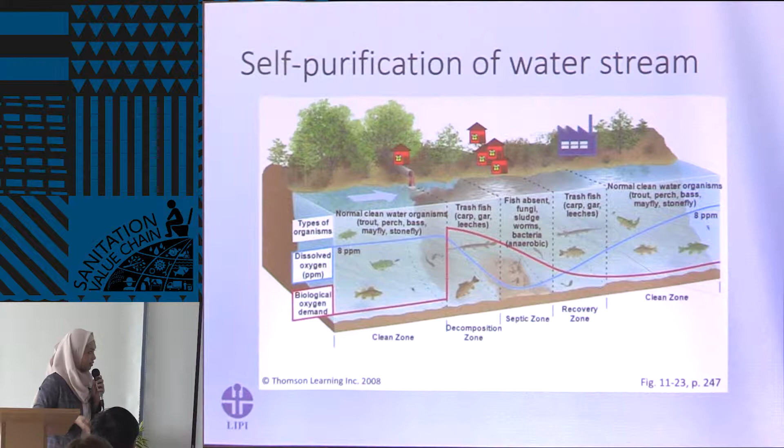We also asked about solid waste management. Some of them say that their household garbage is taken by a garbage man. Some of them just throw the garbage to the ditch, and then it goes to the river, just like we saw. And then some of them burn their waste. So there is a problem.

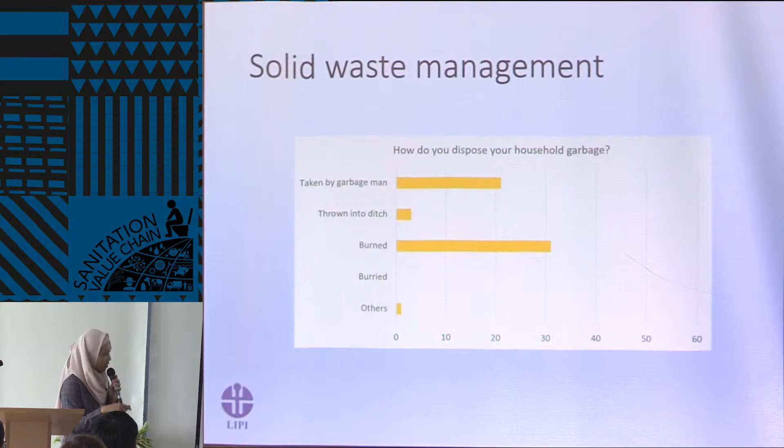What we found is that there is no current problem with the sanitation. There is still some problem with the waste management. But what we find is there is a problem with the tofu wastewater. You remember that there are about 100 entrepreneurs in Giriharja village. So at least 10 of them are tofu factory owners, because there are 10 tofu factories in this area. And these tofu factories generate 18 to 36 cubic meters of tofu wastewater per day.

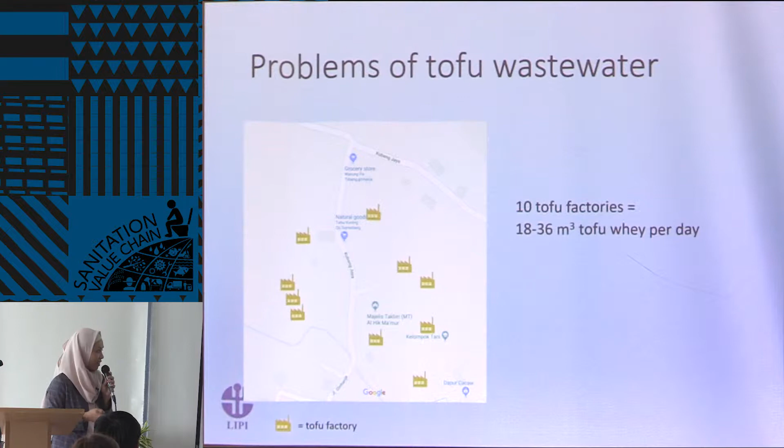And around 50,000 people who live downstream are affected by tofu wastewater discharged to the river. And not only the people downstream, because this tofu factory is actually a small-scale tofu factory. So these are just regular houses, and the tofu factory is just adjacent to them. In fact, what usually happens is that the tofu factory owners just build the tofu factory at the back of or next to their houses. So people live just next to the factory.

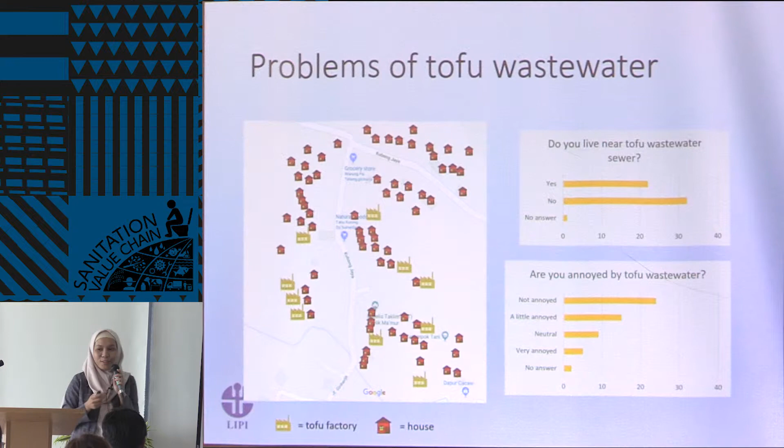So we asked whether they live nearby or not, and whether they are annoyed by the wastewater. Surprisingly, some people said they are not annoyed. It's probably the ones that don't live near the factory. But still, some are a little annoyed. Fewer people are neither annoyed nor not. And not a lot of people, only 5 people, are very annoyed by the wastewater. We also asked what causes the annoyance. And most of them say that it's because it smells.

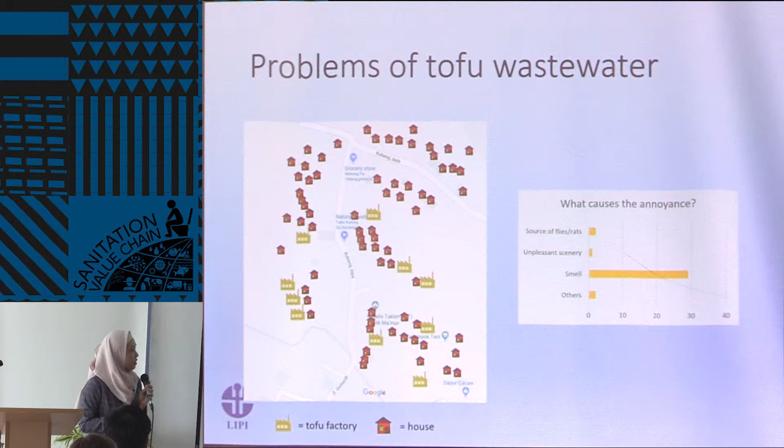So in 2014, starting 2014, we initiated a wastewater treatment plant to treat the tofu wastewater with a grant from NTU. The wastewater is treated using anaerobic processes in multiple stages, using upflow and fixed bed reactors. It's currently operational, producing 120 cubic meters of biogas per day.

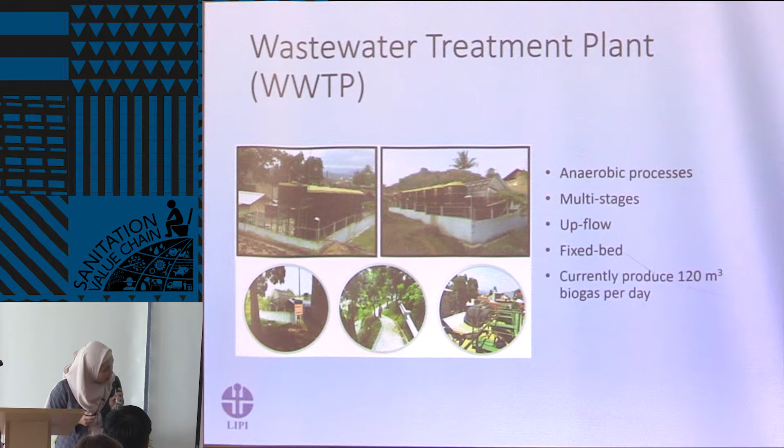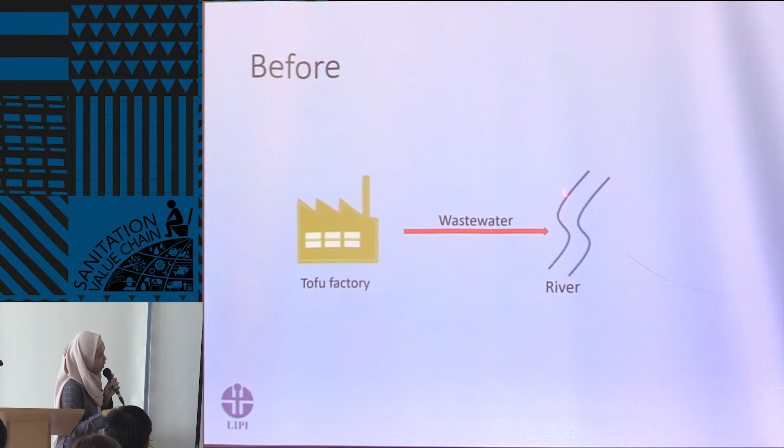So this is the before situation. We have a tofu factory discharging their wastewater directly to the river. But now the wastewater goes to the wastewater treatment plant, and the treated water goes to the river. And in addition, we also have biogas, which can be used, which is piped to the houses for cooking.

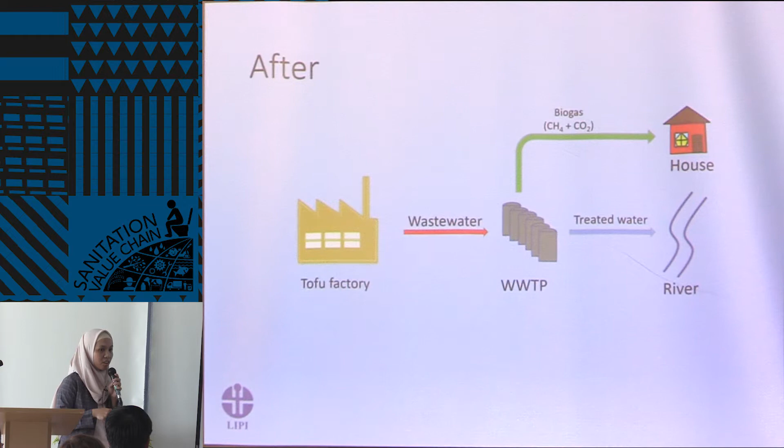So we have 88 households using the biogas. Before, they used these kinds of LPG cylinders, and the price is 25,000 rupiahs or 1.76 US dollars. And the energy that they need for cooking is actually less than the energy that is produced by the wastewater treatment plant. So they can save this kind of money per month.

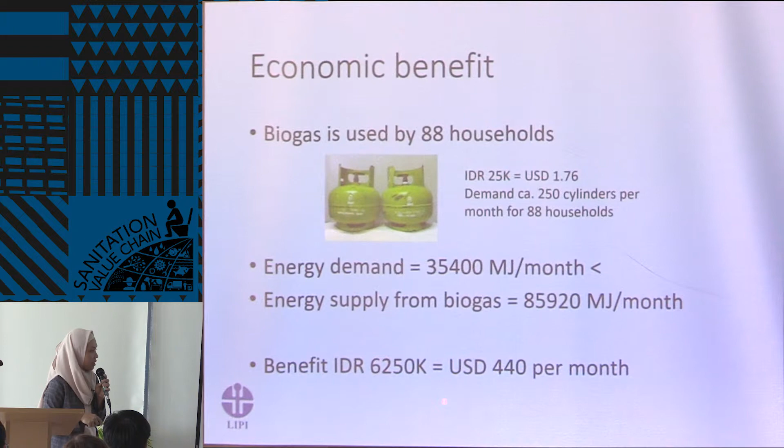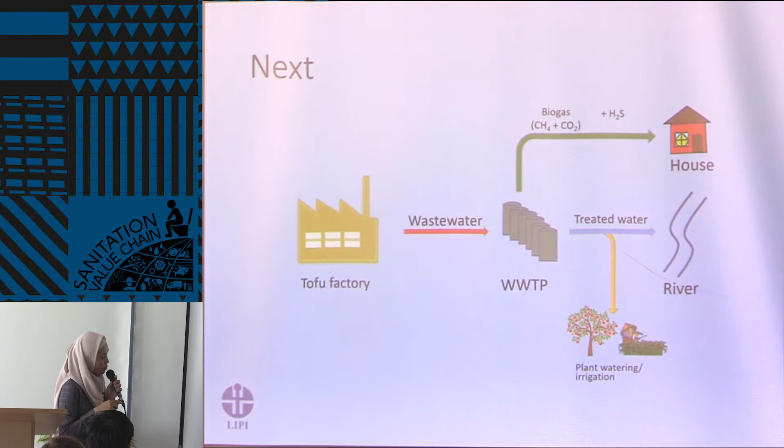So what next? What do we want to do with this system? Now, next to the biogas, we also want to use the treated water for plant watering or irrigation. Some of the farmers already tried using it for their paddy fields, and we will try to use it for fruit production. But we still have a problem with hydrogen sulfide, because the biogas contains methane, CO2, and also hydrogen sulfide. This problem is partially solved by the scrubber.

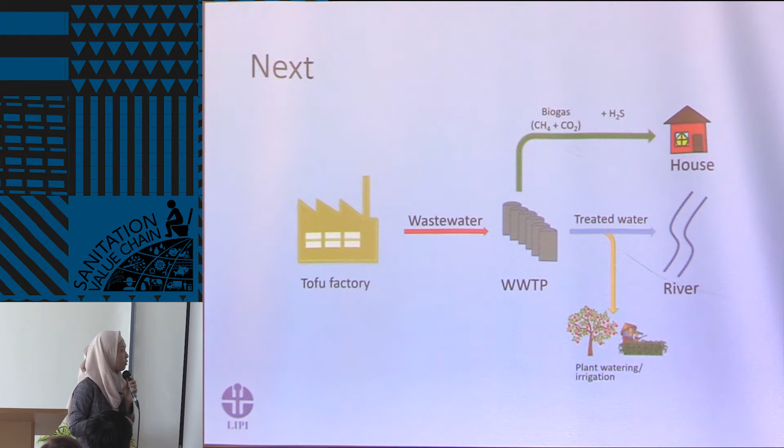H2S is actually produced from the degradation of protein. So what we want to do is add one more unit operation to remove the protein. And we actually can get a nice product from it, and hopefully reduce or remove the H2S.

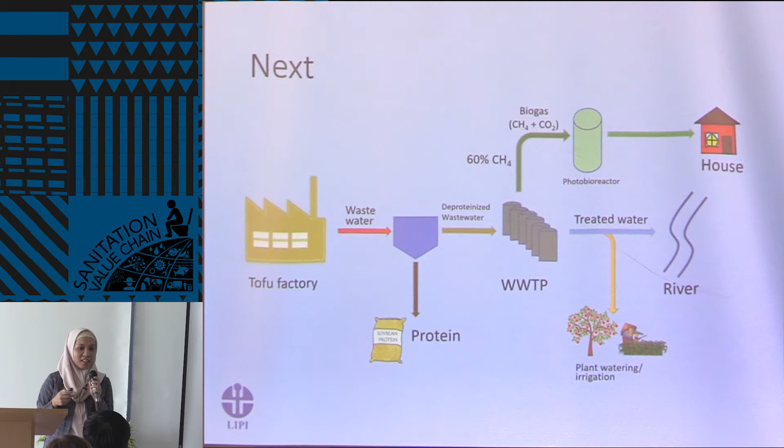And currently we have biogas with 60% methane. Our idea is that it's probably a good idea to put the biogas through a photobioreactor to grow microalgae, because microalgae need CO2 for their growth. So if this works, then we will have a cleaner biogas with a higher concentration of methane and a lower concentration of CO2. And also, we will have microalgae biomass. So this is the idea for value chains from the tofu factory.

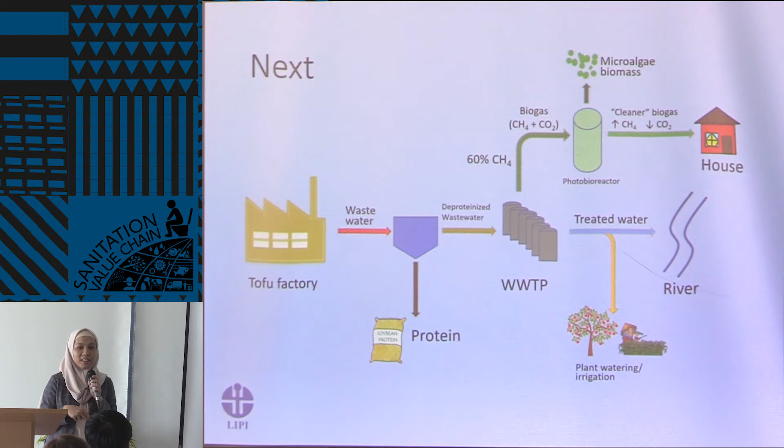So as closing remarks, the self-purifying capacity of rural areas needs to be maintained. Opportunities to create value chains arise from tackling environmental problems, and as a result, community empowerment was built.